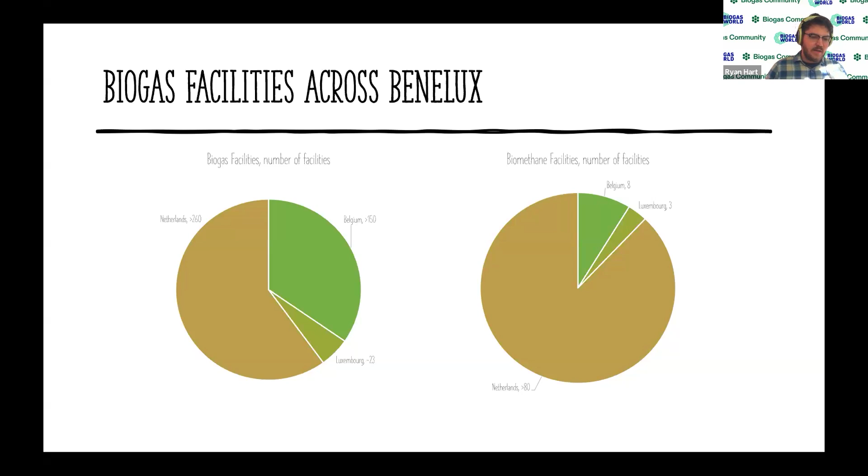On the right, we see the proportion of biomethane facilities across the region. The Netherlands has led the development of biomethane facilities, with over 80 biogas sites upgrading to biomethane. Belgium and Luxembourg have been slower to start, but have put forward targets in recent years to increase their output of biogases by targeting underutilized farm wastes and manures and converting existing CHP sites to biomethane.

Looking at potentials across the region, manures and green wastes hold the highest potential for continued development, followed by intermediate crops, agricultural residues, and industrial wastes.

When examining regional targets, Belgium has been divided into its two main subregions, Flanders and Wallonia, which have both set separate regional potentials for biomethane development by 2030. Fluxys, the transmission system operator for Belgium, has estimated the 2030 potentials to be 8 terawatt-hours for Flanders and 7 terawatt-hours for Wallonia. The Wallonian government has set a more aggressive target, aiming for 8 terawatt-hours by 2030. The Netherlands has set a 2030 biomethane target at around 10.5 terawatt-hours, short of the 16 terawatt-hours estimated as feasible, but still a very ambitious target.

Permitting and regulatory approvals remain a challenge for reaching these targets across the region, and therefore the conversion of existing CHP facilities for biomethane production is viewed as one of the most effective avenues for meeting these short-term goals.

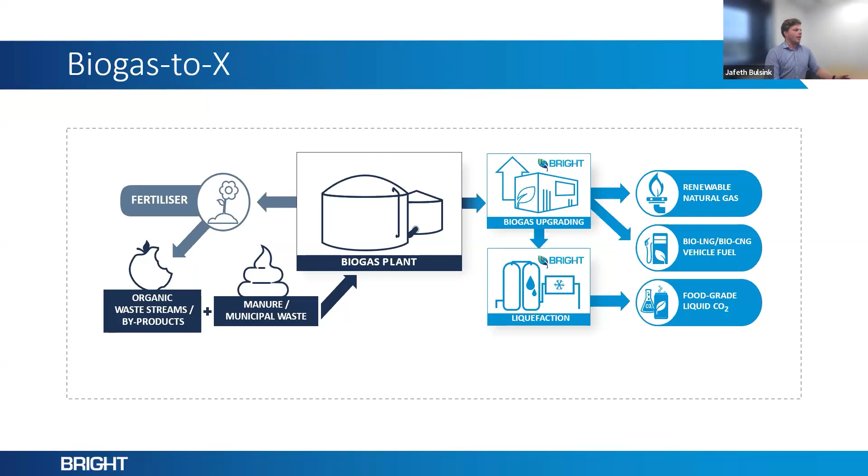And make food-grade liquid CO2 from that. But nowadays we also deliver bio-LNG installations at the back end of our biogas upgrading technology, where you can produce liquid biomethane for the transport sector, or if there's no gas grid locally, and also bio-CNG fuels.

So to dive into the opportunities and challenges immediately for the Benelux, I split it a bit into different opportunities and challenges, not directly linked to the countries, but it's named there.

If you look at the opportunity for subsidies, you have a very nice structure in the Netherlands with SDE++ subsidy for biogas and biomethane production, and also nowadays for liquid CO2 production at the back end of a biogas upgrading system. In Belgium, there are not a lot of subsidies available, or not at all.

Although there you see a very big push because the CHP runs out of a feed-in tariff, and biogas plant owners need to switch to do something else with the biogas they already produce. So there's still a big opportunity there, next to the challenge that there's no subsidy.

Projects are still happening, and everybody can see it on the chart that Ryan just showed, there's a lot of potential in Belgium, but there's still a lot to gain on installing biogas plants and biogas upgrading technologies. The biogas market is also maturing more and more.

So we see that it attracts a lot of attention from equity funds or large energy companies. I'll dive into that a little bit more in the next slide, but especially you see big companies buy a biogas plant, revamp it, install biogas upgrading technology and/or CO2 liquefaction technology at the back end of it, to make biomethane and liquid CO2.

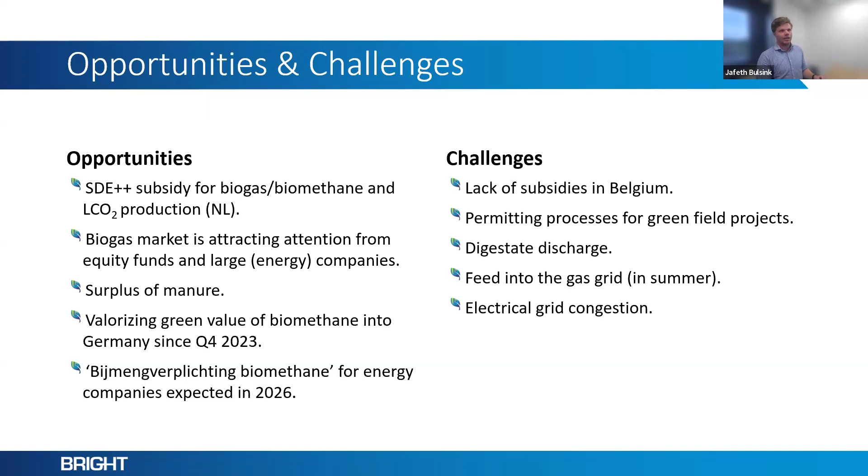In Belgium, it can be a bigger problem because you have to comply with high biomethane quality requirements, which is possible with biogas upgrading technology, but there are some difficulties with the gas grid operators there. The biggest challenge, especially in the Netherlands, is getting an electrical grid connection for greenfield projects and revamping CHP to biogas upgrading, but also for your

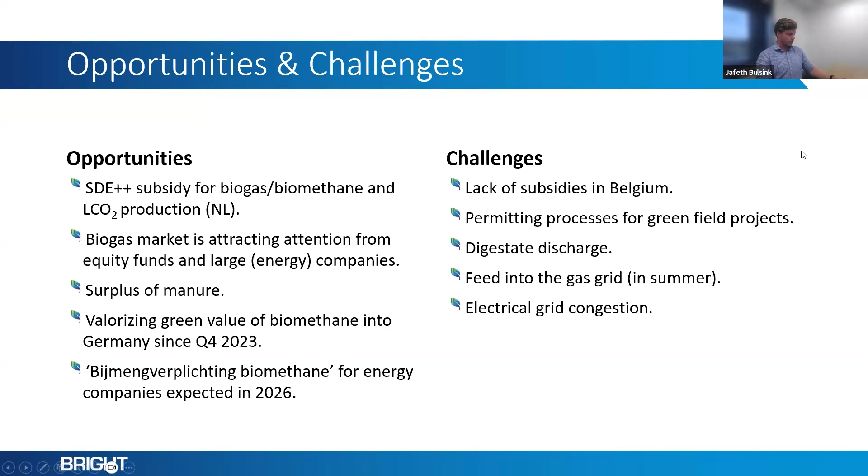CO2 technology. A little bit on the bijmengverplichting on biomethane, where we see a very big opportunity for CO2 liquefaction, biogas upgrading, and CO2 liquefaction in the end. The goal in the Netherlands is to produce 2 billion cubic meters of biomethane per year by 2030, which was only 1/10 of that in 2022.

The goal of the bijmengverplichting is to reduce 3.8 megatons of CO2 in 2030, which equals, averaged on the carbon intensity score, about 1.1 billion cubic meters of biomethane. This means energy companies are obliged to buy biomethane from the market, raised in a few steps until reaching 1.1 BCM in 2030. That makes the market for biomethane much bigger, and lowering the CI score of the produced biomethane also leads to a higher value of the biomethane for energy companies.

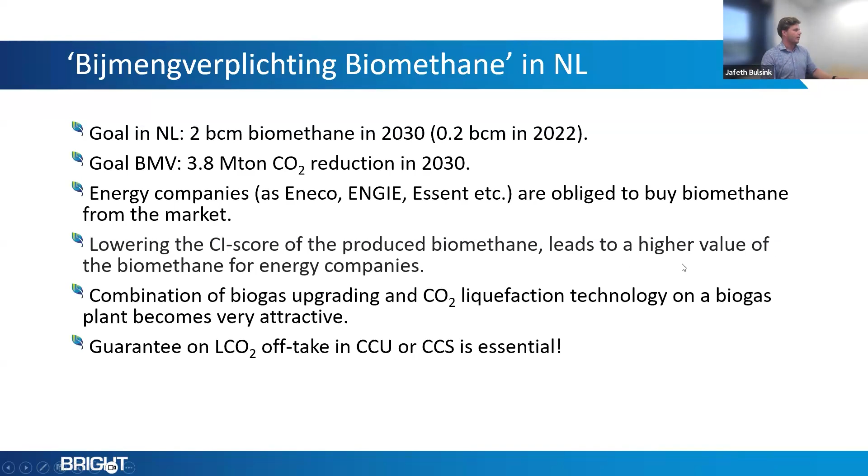So when you liquefy your CO2 at the back end, you lower the carbon intensity score of the plant, and the energy company gets a higher price for the biomethane. So there's real value in adding a CO2 liquefier at the back end. One challenge we see is that there has to be a guarantee on liquid CO2 offtake, because you need to get rid of the liquid CO2 afterwards. But there's a real push going on for adding CO2 liquefaction at the back end to achieve as low a carbon intensity score as possible, and then valorizing it in the biomethane that you inject into the grid.

Short, second to last slide, but one nice project we did in the south of the Netherlands, in Tilburg. There we started production in 2022 at the back end of a wastewater treatment plant, where we installed a 3-stage membrane biogas upgrading system with a capacity of 1,600 cubes per hour, and where we also liquefied the CO2 at the back end at 1,200 kilograms per hour. The CO2 produced there is brought to local greenhouses that use it for growing their plants and flowers.

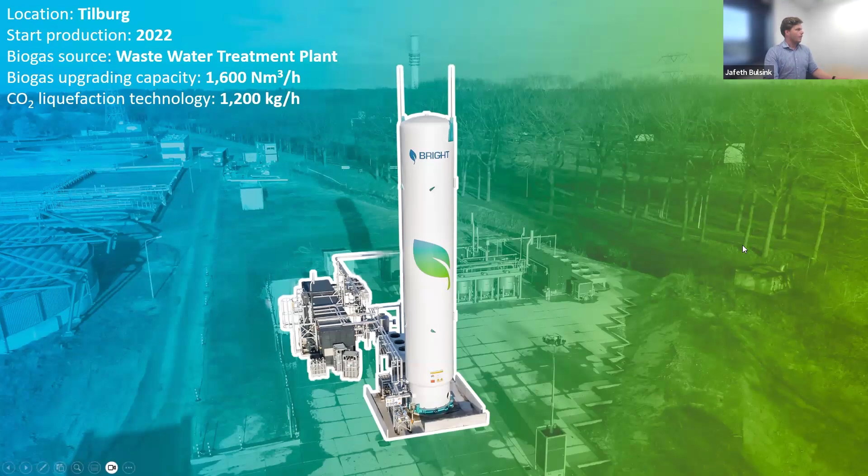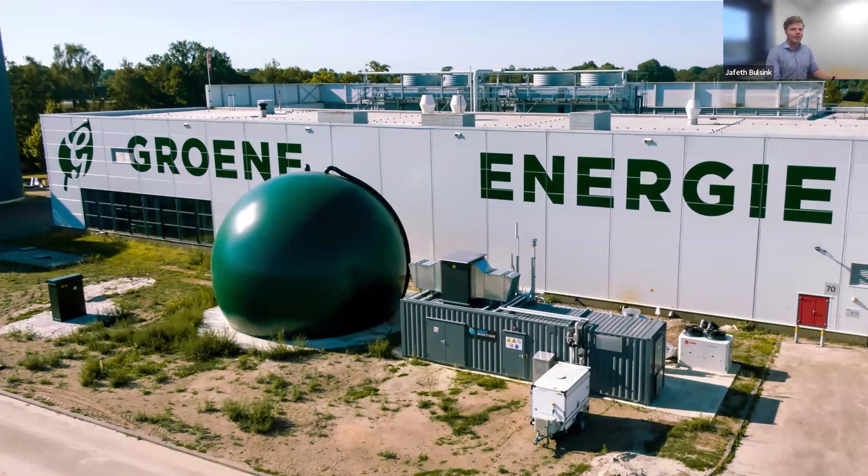So I would like to invite everybody to ask questions, and let's bring as much green energy into the Netherlands as possible. Thank you.

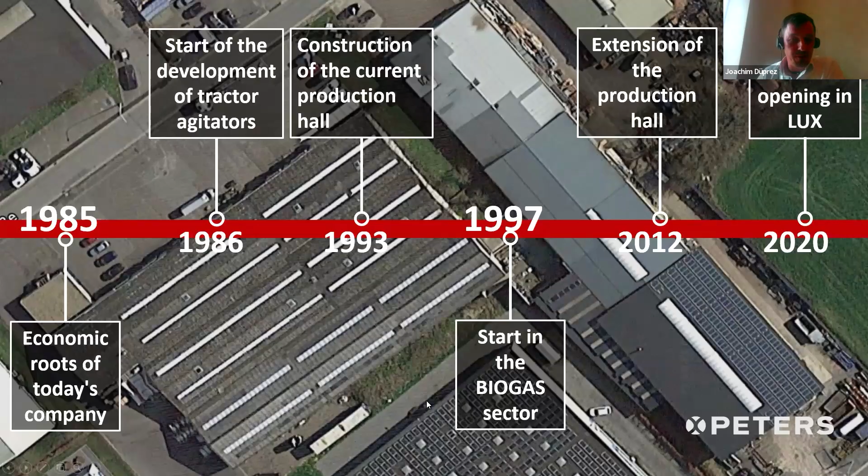Our factory produces from the design. We got a separate design office. We make most of the parts by our own, and complete the installation on site and the service later. We make the complete line from A to Z.

The big advantage is that there are some mixer manufacturers on the market, but we are a little bit specialized because we are more than 20 years in the biogas market. We have some mixing systems which can work with higher dry matter. Later I will show you an example in Luxembourg, which is one of the heaviest biogas plants in the kind of driving.

And also to change levels - our mixing system can work with changing level. These are also specialized for our company.

In the next steps, this is a step which Germany went through in the last year: higher efficiency, less own power to use in the mixer. This was one of the important things for our customers. There we make a lot of reference in the last years because it was more and more, and it becomes a standard.

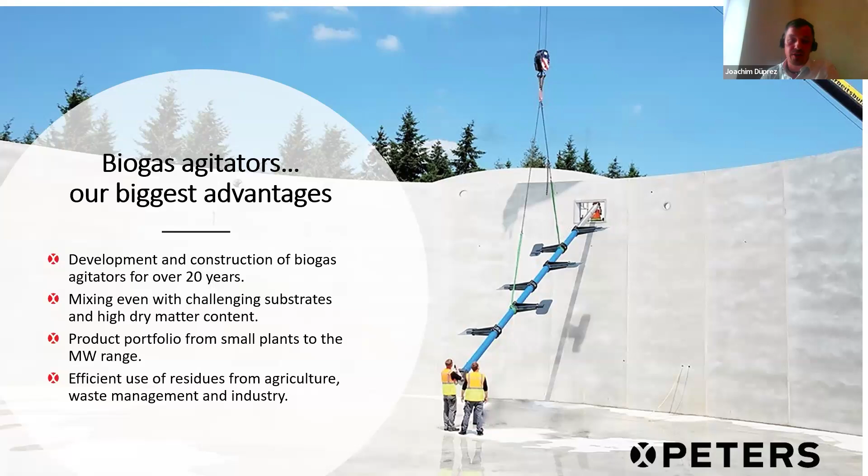We are located in Eupen. This is the east of Belgium, near to the border of Germany and the border of the Netherlands. You see the three big countries around us: Germany, France, and Great Britain. These are our main customer countries.

But of course we start in the Benelux, and in our history Luxembourg was one of the important countries to start, also Germany, also Belgium. But in the history Luxembourg was so important that we still have till today a sales office in Luxembourg, and this is also where I was located in my job.

So some facts about Luxembourg. It is a small country, but like Ryan shows in the first foils, 26 biogas plants are all over the country. Most are with electrical power, only 3 with methane to the grid, but it is 5% of the complete energy mix of Luxembourg, and that seems to be a lot from only 26 biogas plants.

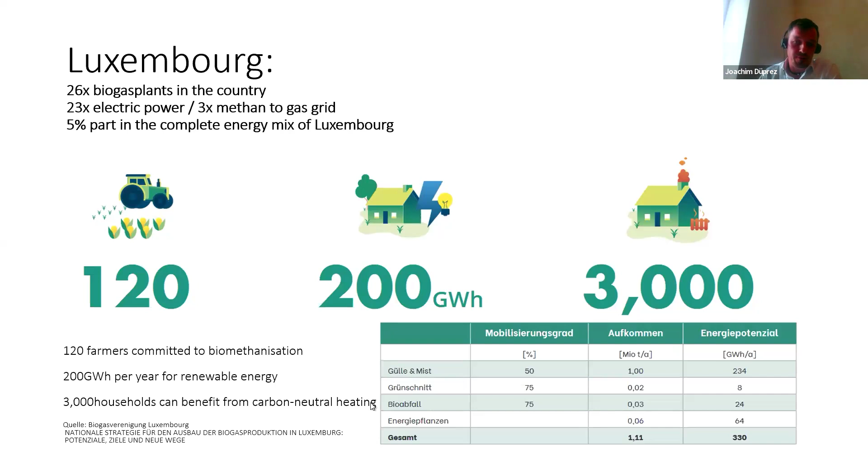So this is also a problem for the government, and they think about what can we do, and they make new rules, and they give the smaller plants up to 100 kilowatt 26 cents per kilowatt. So in the future, since the end of this year, you can build a biogas plant and you get a higher volume of a higher amount.

Until 2 years ago, prices were some cents lower, so nobody was interested in building. They did the same thing with gas - they pushed the prices up a little bit.

Biomethane is a bit of a problem in Luxembourg because there wasn't a big enough grid to connect to. So most biogas plants will also in the future work with electricity and feed electric power to the grid.

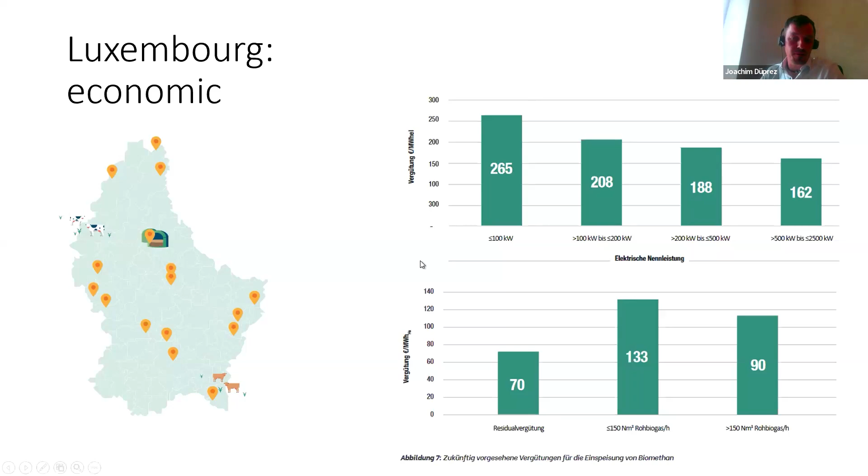I will give you three examples of biogas plants. The first one is in the Netherlands. It was the biggest paddle mixer we built in diagonal tanks, and it was a post digester.

It was 10 meters high, and the big advantage is they change the level - in wintertime they are full, in summertime they are nearly empty. But they don't have to think about the mixing layer or anything else. With the paddle mixer, you are every time on the correct layer and you mix the whole tank every time.

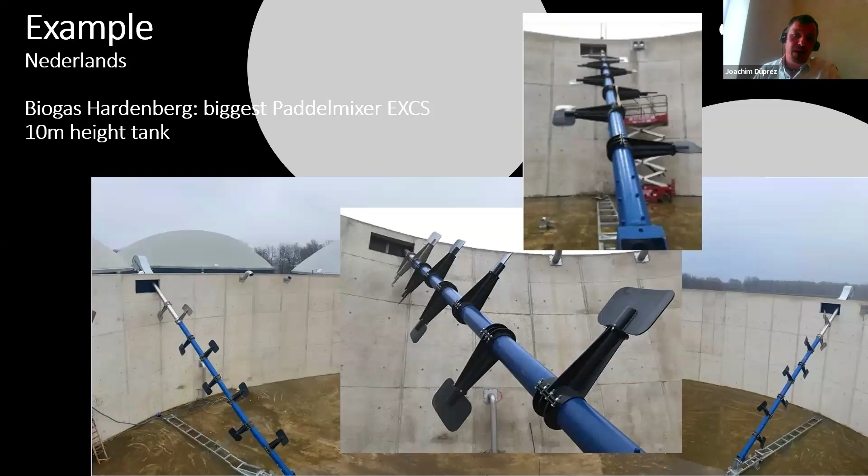The next example is from Luxembourg. It was one of my famous biogas plants because I was the project leader in 2014 and 2015 on this project, and it's a project with high efficiency.

It's located in Junglinster where there's also no gas grid, but the owners thought about what they could do to make it efficient. They took input from 20 farmers, and they go to the industrial zones about 1 or 1.5 kilometers from the biogas plant and sell all the heat. So it's a really efficient and useful biogas plant.

From the input situation, they drive high dry matter - more than 40% dry matter in the fermenter. The limit isn't the agitator side, the limit is with the pump. If you go higher, you cannot pump it out of the fermenter, but we still mix it.

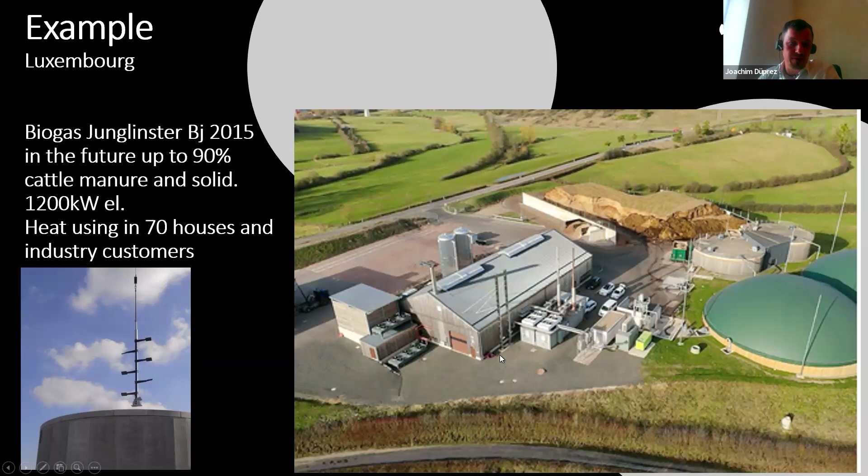It's a really nice, highly efficient project, and this is something that will also work in the future with the new rules of the government. If they use heat, I think in the future some biogas plants in Luxembourg can become like this.

He had to install a hydrolyzer in front of it, and we installed mixers in stainless steel in the hydrolyzer and in the fermenter digester. The mixing system is paddle mixers combined with stub shaft mixers, along with a post fermenter and storage tank.

So it's also a really beautiful plant with another idea, because they can use waste from the food industry. It's a biogas plant that I'm sure will also work in the future.

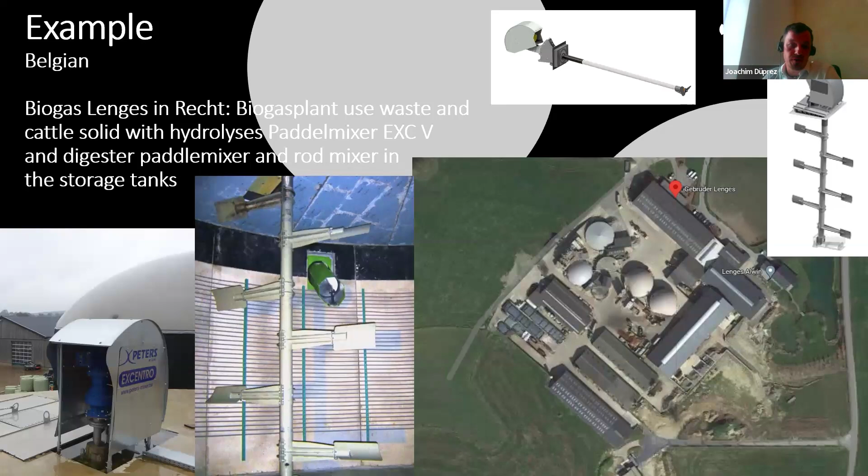So I hope I took the time to give you some information. If there are any questions, please let me know and I'll try to give you an answer.

Thanks for your presentation, you gave a very extensive overview of the industry in Luxembourg. Do you see the Netherlands, Belgium, and Luxembourg as similar or different when it comes to building new facilities?

I think they are really different. It always depends on what the rules from the governments are, and the three countries have their own rules. Like I told you with the example of Luxembourg, if the last 10 years weren't the best situation for farmers, nobody will invest. So now they've taken the next step - maybe in Luxembourg, and also in Belgium, there will be a next step too. In the Netherlands, I don't know the exact situation, but they have an easier situation for biogas plants because they can more easily connect to the grid.

But we are not sure how fast the future will be for using more biomethane. So I think this is a main key for the biogas plants to stay or fall.

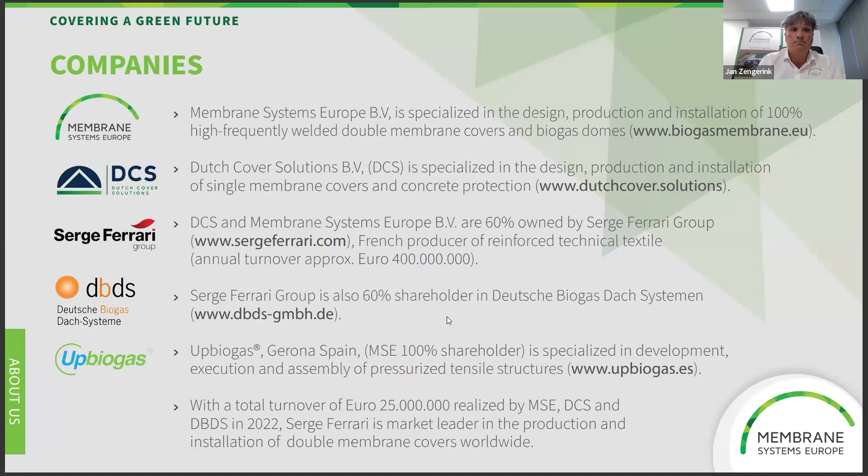We have a lot of unique selling points. We consider ourselves having one of the best roofs available. That's also one of the reasons, for example, Bright works with us, with special design and a lot of installation experience. I won't go really into this. Where I really would like to go is that we are specialized in adding a new aspect to a roof, and that is insulation and the solar concept.

Here you can see countries in the world where we have done installations - here is the Netherlands, here you have Belgium, and here you have Luxembourg. Last week I was still in Luxembourg to sell some single membrane and double membrane roofs.

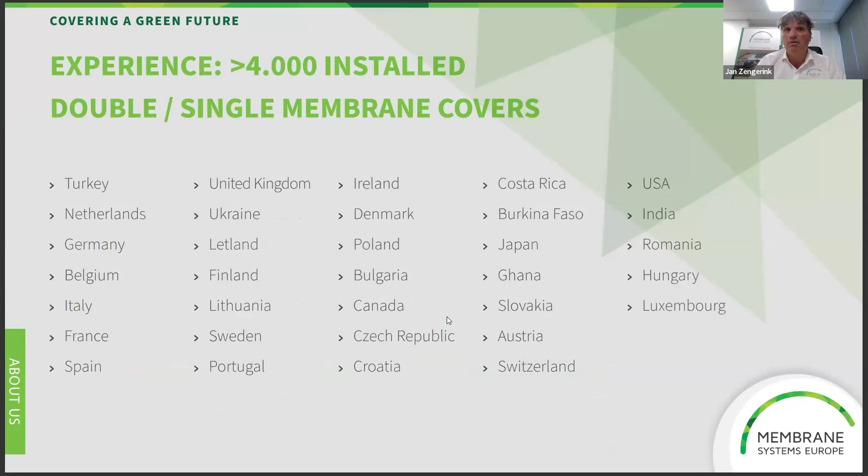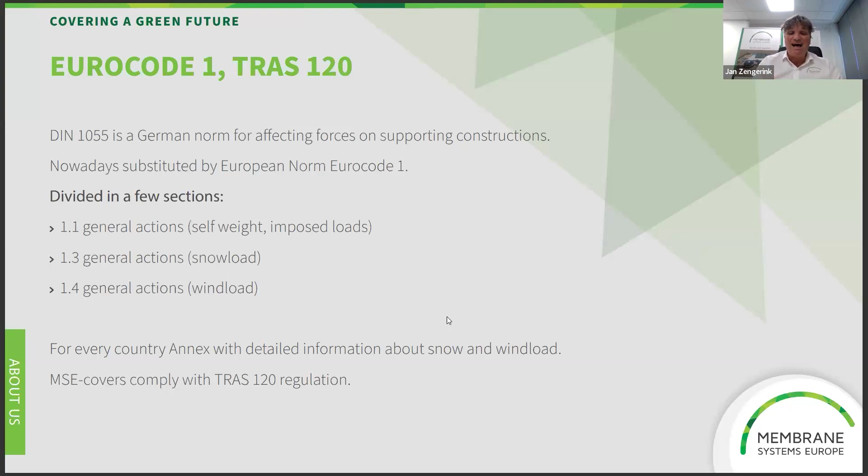We comply with all the necessary codes to have the highest standard. What's interesting is that we comply with the so-called Eurocode 1. When a building in Europe is built according to Eurocode 1, it complies with the fact that a human being must be able to live in it. So in case you want, you can buy a silo, put a double membrane or single membrane on it, and you can live in it. But that's the highest standard possible for construction.

What we have seen in the past, and it's very interesting - especially we started with this in the Netherlands, with a sister company of Bright with Host, that were insulated roofs. So when you look at the biomethane world, I think it's still quite a small world. When I'm well informed, we have worldwide about 30,000 biogas installations.

A few years ago there were only 3,000 of those, where about 10% was biomethane. And the expectation is, in my opinion, that this market will really go into the biomethane applications. So a lot of traditional biogas installations where electricity is produced will be converted into biomethane installations.

And in those biomethane installations, it's important that you have a better energy balance. Normally, when you produce electricity, there's abundant heat to heat up the digester, to heat up the liquid, etc. When you do biomethane, that's not the case.

So sometimes you have to even buy electricity to heat up the digester. And in that case, you really have to look at the energy balance.

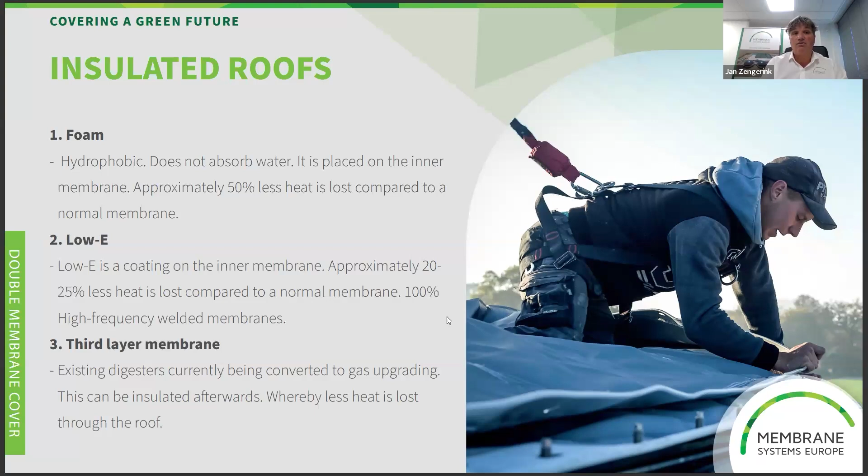So we apply the concept of insulated roofs. When you look at U values, and there are some discussions, but normally for the U value you have a heat loss, we think, of about 2.75 to 3.0 watts per square meter per degree Kelvin.

And that can be reduced up to 20 or 50%. So these are U values that are really interesting, and they reduce the payback time of the material to a few years, so quite interesting.

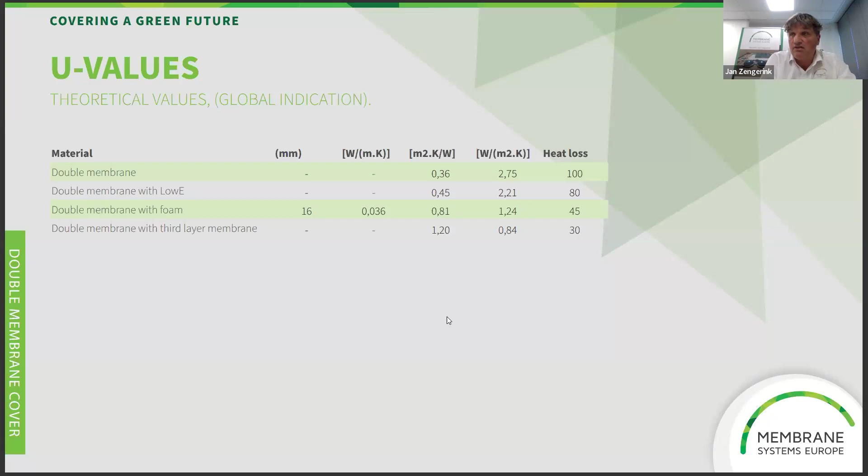What we also have done recently is installed flexible solar panels on a single membrane roof. We are continuing developing this concept, and right now we are getting payback times of about 3 to 4 to 5 years.

This gets very interesting. In the market of single membranes, there's not a lot of difference between several producers, so we wanted to make the extension and the difference by adding solar panels to it.

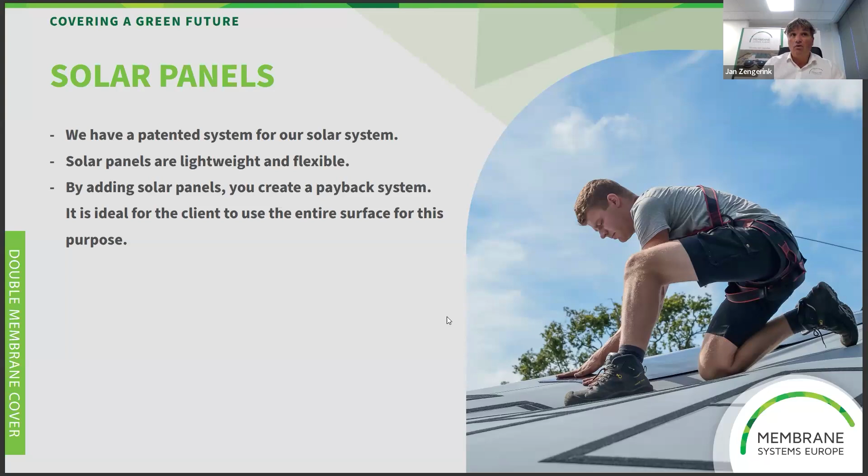Everybody all around the world likes it, but we have to improve this concept due to the fact it's still not ATEX satisfied. But when it's ATEX certified, then we can roll it out all around the world.

This one is a very interesting product, and here you see a double membrane that is used for the storage of CO2. And then we go to the Dutch biogas market, the Belgian biogas market, and

the Luxembourg biogas market, relatively small markets, but just like all the other ones, interesting because we can apply a lot of normal roofs or insulated roofs.

But what we see in the Netherlands, we have a lot of greenhouses, and this greenhouse technology is well known in the world. We see a lot of people coming to greenhouses in the Netherlands to learn about the technologies they apply. This is an installation we have done in the Netherlands.

And this is a roof, and I think it's 19 meters long, 16 meters wide, and the height of the membrane is 8 meters. And there's only storage of CO2.

CO2 right now has a value, which is interesting, because in the past it didn't have a value. So you see a lot of requests also from the United States, due to the fact that in the Netherlands we are very good apparently at greenhousing and at CO2 storage. So this is a very interesting market for us.

Another thing worth mentioning is that in the Netherlands we are quite entrepreneurial from a cultural point of view. We are more entrepreneurial, more risk-taking, I have to say, than other countries around us, like Germany or France. So we also have supplied domes for products like these, but round, for the storage of hydrogen.

Next to that, almost coming to the end of our presentation, we have a web shop, and that's approximately what we do in the Netherlands, Belgium, and Luxembourg.

So one quick question before we move on. How do your membranes and biogas domes contribute to the sustainability and environmental friendliness of these energy solutions? What specific advantages might they offer compared to traditional energy storage?

I can tell you a very nice story. People asked me whether they could store hydrogen in a biogas dome, and I said it's not possible. The client said, yes, it's possible. I said it's not possible. He said it's possible. I said, I know something about membranes, so I don't think it's possible, because the products, according to our spec sheets, have a certain permeability, and already some CH4 is escaping from it.

Although according to the papers we have the lowest permeability in the market, it's still escaping, so I thought the H2 molecules might escape quickly. Then we did a test, and we found out that most of the H2 molecules still stayed in, so the permeability was quite low.

Then I asked our production in Germany, how is it possible that you have a certain permeability, but in reality the H2 stays in? The German said to me, yeah, but the reality is that our permeability is about 10 to 15 times lower than what we mentioned in the papers, because we want to be at the safe side.

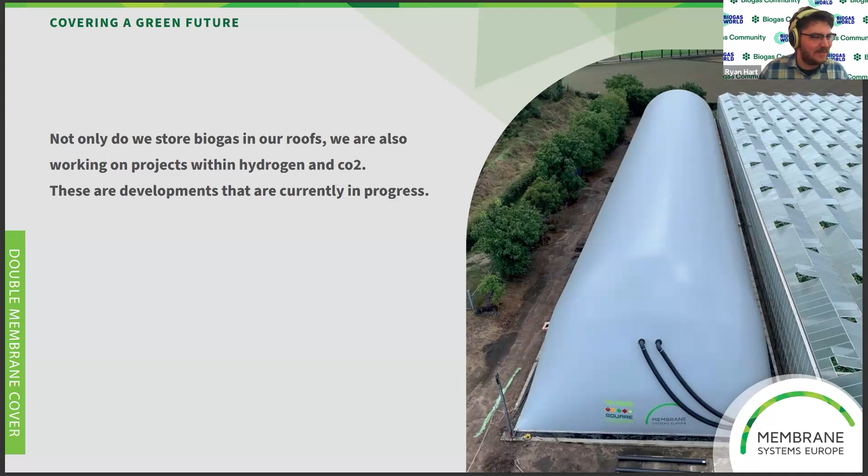Thank you, Ryan. I will share my screen. I hope you are still all awake and full of energy to listen to the last speaker of this afternoon. I changed my title a little bit, because we're talking about challenges, and it's definitely a challenge to get rid of waste, or sulfur-loaded activated carbon. But luckily, Desotec has a solution for that. Let me first introduce Desotec to those who don't know it yet. We are a supplier of mobile activated carbon filters.

We have a fleet of approximately more than 4,000 filters. We are with 400 people generating 150 million euro turnover and have availability 24/7, meaning we deal with emissions a lot. So we have the possibility to act fast and react fast on questions.

We are active in both regions: North America, where we have our headquarter in Darlington, Pennsylvania, and also some reactivation furnaces in Parker, Arizona, and Red Bluff, California. Here in Europe, we have our headquarter in Belgium, where we have 4 reactivation furnaces, and then 4 hubs across Europe to fill and empty these mobile filters and transport waste up and down.

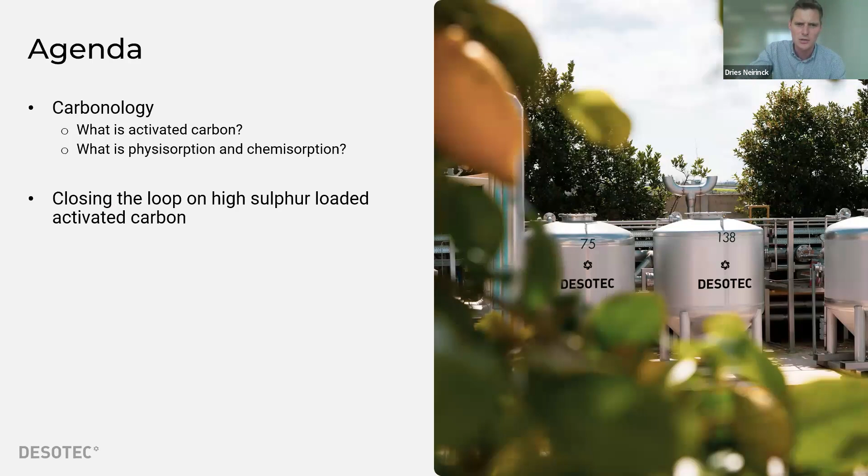But first of all, what is activated carbon? Activated carbon is in the end a non-hazardous product. It's a carbon-rich material, and it has typically a very porous structure. Thanks to its large internal surface, it can adsorb impurities, and that's thanks to an activation process.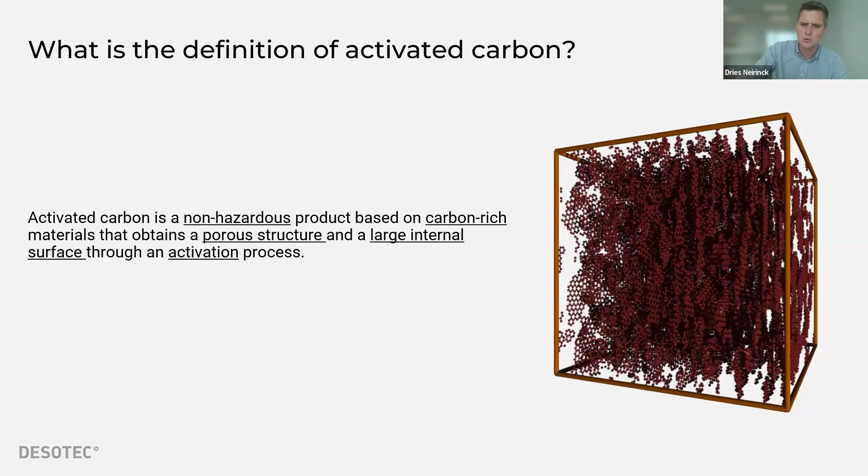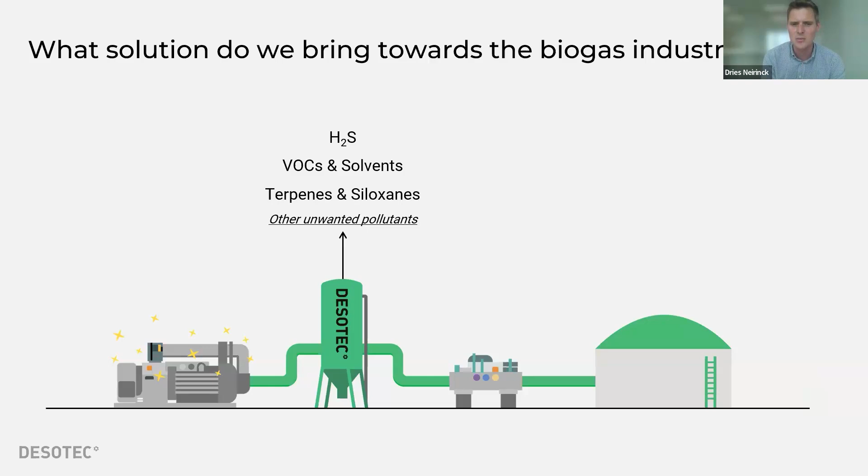During this adsorption process, as I said earlier, there are two types of adsorption. But let me first deep dive into biogas. What we do there is typically with mobile filters, we will remove H2S from biomethane or biogas to protect engines, but also to protect the membranes behind. Also, VOCs and solvents might need to be removed, terpenes and siloxanes, or other unwanted pollutants. We put this activated carbon into a mobile filter vessel, which is easy to install.

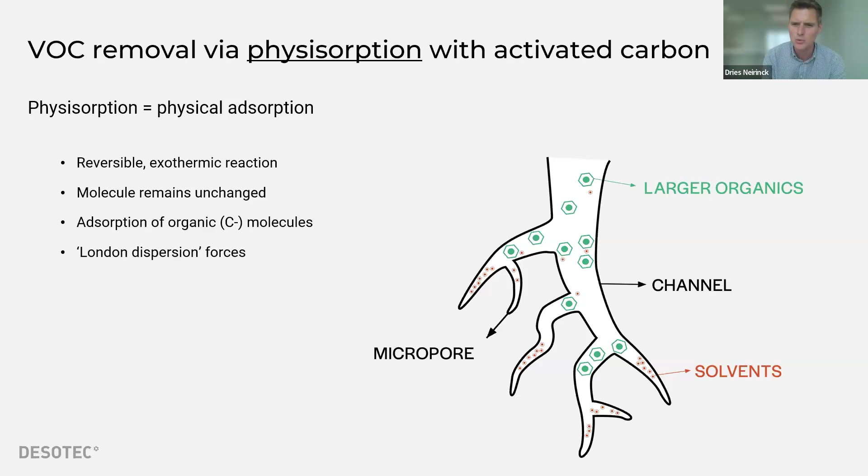This carbon, which is saturated, we can bring into our reactivation furnaces, and under the process of pyrolysis, it will become volatile again. The molecules will remain unchanged. Typically, with the physisorption process on activated carbon, we talk about a carbon backbone of the molecules that we will attract. For H2S, it's a bit different.

H2S removal is typically done with chemisorption, and chemisorption only happens when there is a chemical reaction between the adsorbate and the surface. In other words, you will need a chemical compound to create a reaction on the activated carbon. That reaction on the carbon is an irreversible reaction for these inorganics, which is not possible to clean away afterwards today in a classic reactivation process.

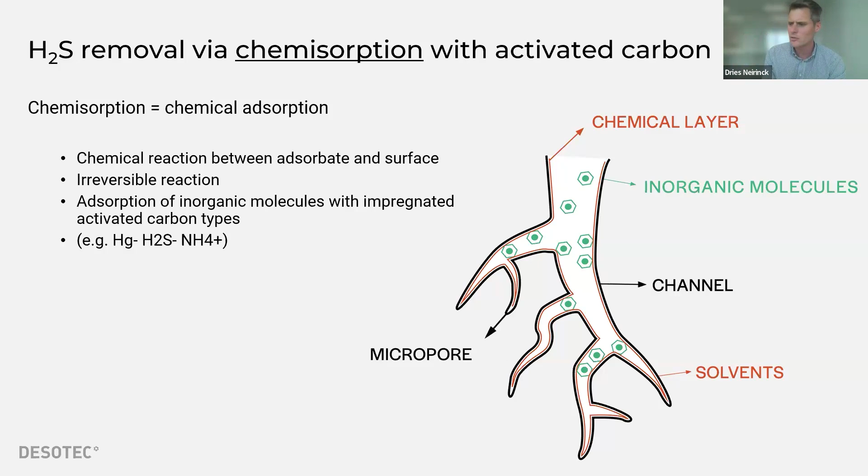However, Desotec is currently building a new facility to be able to take back this carbon.

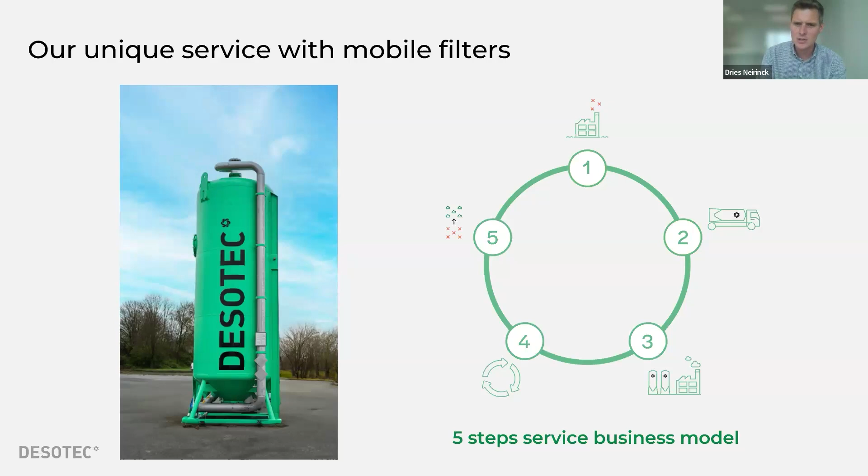In the 4th step, you see that we will be able to take back saturated carbon in a sustainable way, and we will remove the impurities from that carbon in a controlled process and ship back these filter vessels to customers. Now, how can we help you close the loop with sulfur-loaded carbon?

Sulfur-loaded carbon today is a waste flow which needs to be burned, which creates emissions. Thanks to our new process, we will be able to reuse that high sulfur-loaded carbon, and we will produce from that carbon a fresh new carbon. During that process, zero discharge will happen, and byproducts will be converted into valuable resources.

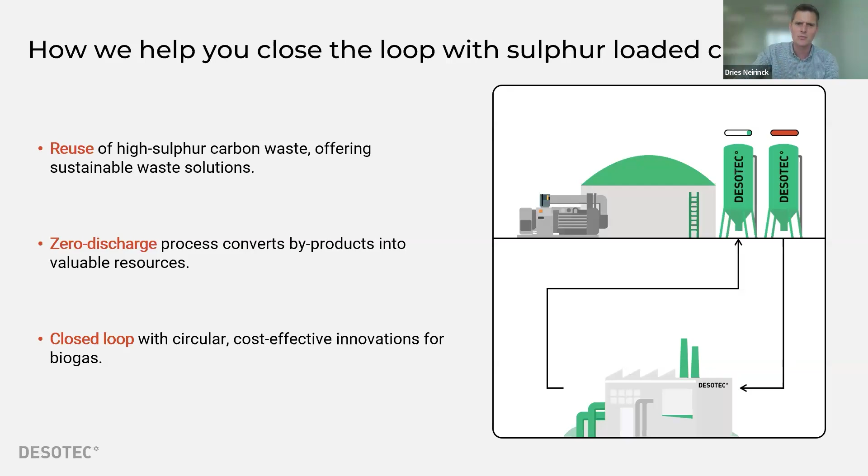You have the carbon itself, which we will use to produce new impregnated carbon, but you also have steam as a byproduct, which we will use to generate electricity. And the sulfur will also be saved, because we will produce gypsum during that process. So we can say that it's a closed loop, circular, cost-effective innovation for the biogas market.

Here you see some typical statements. First of all, we will be able to reduce CO2 footprint.

It will no longer be needed to burn the saturated carbon, but we will be able to gain it back. Also, we will be less dependent on sources from the Far East, which creates CO2 during transport over the ocean, and less dependent on non-European sources. We will be able to produce Belgian-based carbon, and also meet current and future environmental standards.

Of course, when we produce carbon out of waste, you can have some questions about sulfur loading. What about my process? What about the stability? We did some tests already before our installation was up and running.

We saw that the equivalent sulfur loading is the same as with the Asian activated carbon. We also see that you don't need to change your process conditions. Typically during H2S removal, you need to add oxygen or increase your relative humidity, but it's the same rate as with carbons produced in the Far East, and it shows equal stability.

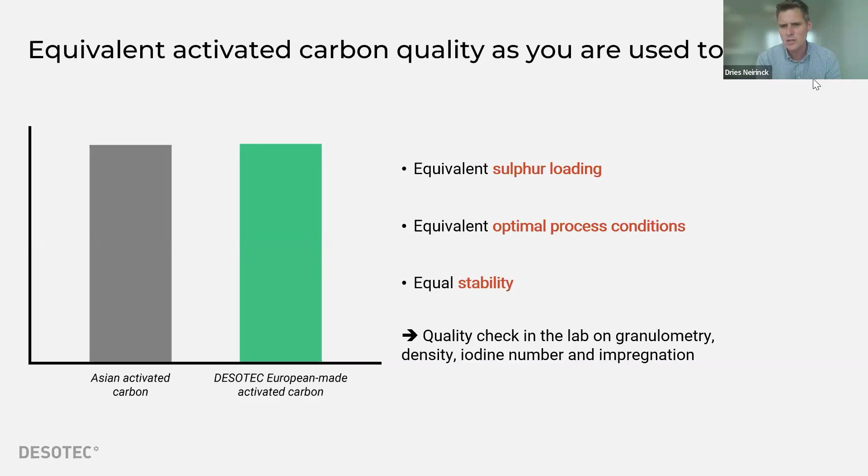This is all monitored by our own lab and our own R&D division, who typically does analysis on density, iodine number, and impregnation level.

It's a thermal process. Some of you might ask, why are you not simply washing the carbon? But we do it in a thermal process because we did tests on this for a decade. This is a new installation that wasn't developed in one day; we've been busy with this for more than 10 years now.

We saw that it's an effective and efficient way to separate the sulfur and organics from the activated carbon. In the end, it's complete removal and destruction during this process. There will be no cross-contamination of pollutants between different clients because we produce batch-wise and do a quality check as well, and there is elimination of the liquid discharge.

On the other hand, addressing the SOx emissions during this process, we will be converting them into gypsum, a sustainable byproduct for the construction industry, making sure all byproducts in the end are valuable. So this is a patented system,

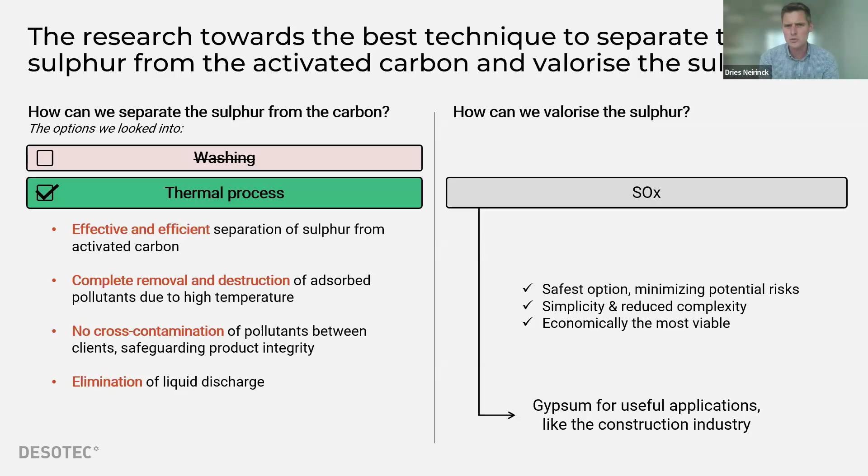Typically, Desotec was already pushing hard on sustainability with the take-back of VOC carbon, treating it in our standard reactivation furnaces. So we're happy to announce that we will be able to take high sulfur spent carbon as well.

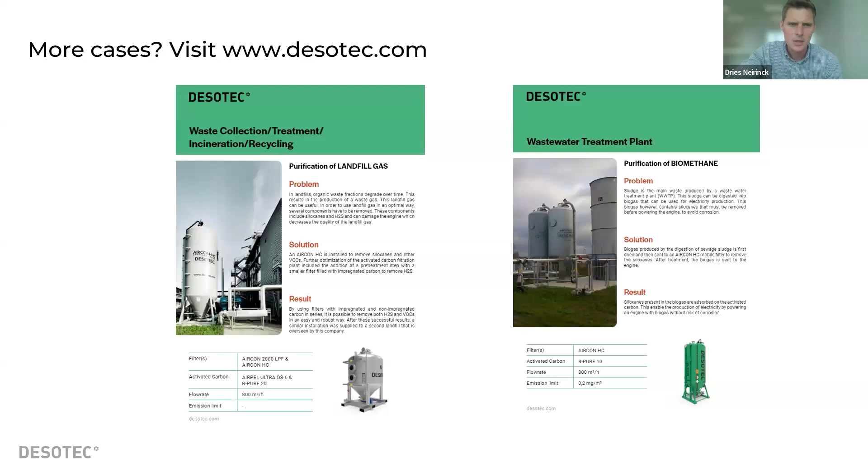In case you want to see more cases, please visit our website, or if you want to contact myself, here are my contact details. Any questions?